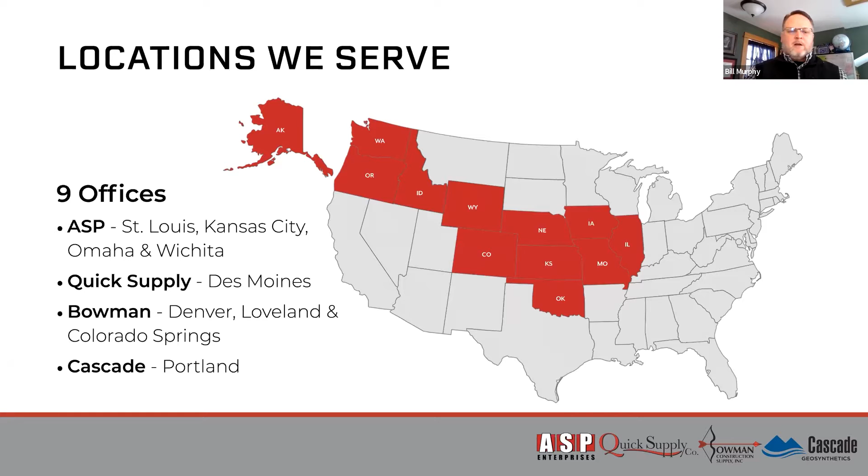Just a quick map of the U.S. that shows the locations that we serve. Most of you are probably tuning in here from the Midwest today. We seem to get a lot of numbers from our ASP and Quick Supply markets, but we are growing in attendance on our webinars with Bowman Construction Supply in Colorado and across the Rocky Mountains to Cascade Geo. I'm available to help with any of those companies.

For those of you that know us really well, this is a repeat. For those of you that are just getting to know us better, we are experts in construction site supply materials. I usually get involved with the categories shown here on the screen now for erosion, sediment control, geosynthetics. Stormwater management is my forte. Revegetation solutions, that's growing in popularity. And hardscapes, we have a hardscapes division in some, but not all of our locations. Those guys really don't need my help, but I'm glad that they're still involved.

We have a couple of those guys on this webinar, but we do try to cross market and help each other out. This connects with what I said before, we can handle a lot of material, and we can handle small jobs as well. The hardscape display is represented with the quick supply display down on the lower left. But our yards continue to grow, our warehouses continue to grow.

We're struggling in some aspects with shipping and receiving. If we get the product anywhere near us, we can get it. We even are working with partners to go to the coast and get what we can. I offered to rent a boat and go out into the ocean to try to get cargo containers, and I was told no, that's a bit extreme. So that's about the only thing we're not doing yet.

Again, I'm proud of our drivers, we take very good care of them. The world is short of drivers, our country's short of drivers, there's signs all over the big cities trying to recruit drivers. So it's important that companies keep theirs happy, and we're blessed, very, very blessed.

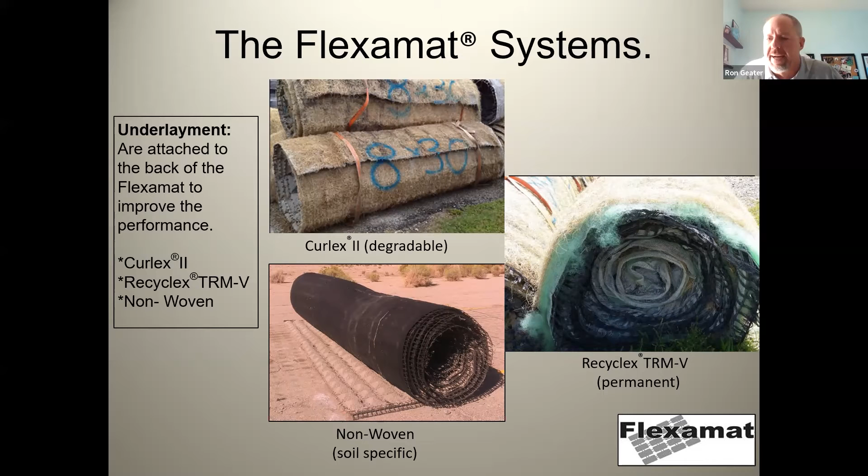So the standard, you're going to use for sheet flow, like on a slope. Flexamat Plus would be at an outlet, a channel. And the 10-ounce non-woven, you're looking at drivable surfaces, bridge abutments, anything like that.

You can see we offer multiple widths. Standard lengths are 30, 40, 50, but we can customize. If your job's 22 feet or 31 feet, we can make that happen.

Here we have a new feature that we've created about a year ago. Why did you do that? Well, I'm going to get into that, Bill. I've got some slides here to show you exactly why we created this extension.

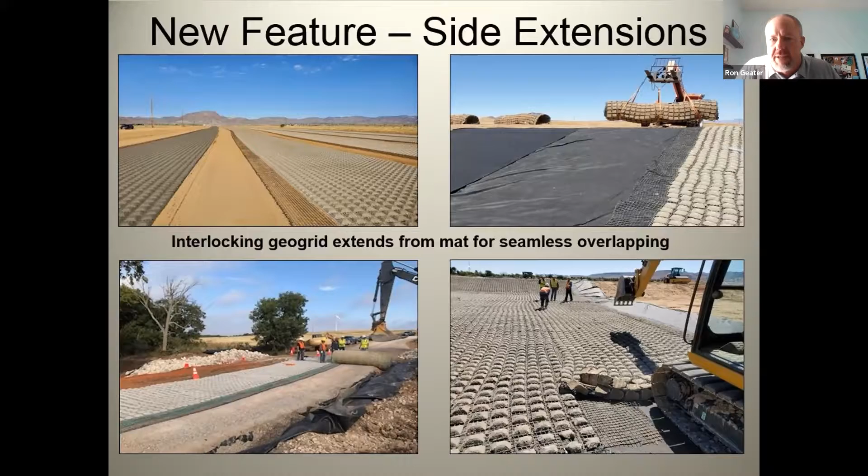Essentially, the widest mat we make is 16 foot wide. So when we make the tail, we can block off part of the machine and make a 15.5 foot wide mat with a 12-inch geogrid tail and the erosion control blanket underneath it.

Now that we have the tail, this is what the extension looks like. So when you're looking at the roll and you're unrolling it, the tail, if it's on the right, it's a right side extension. If it's on the left, it's a left side extension. So I wanted to show a couple of different jobs on how this is being used.

All right, so here you can see the pipe there in the background. This is an install where we put the tail parallel to flow. So instead of, if we didn't have that tail there, the contractor would have had to peel back, put in the erosion control blanket, peel it back, lay the next mat. We've already got that in there for them. They don't have to do anything.

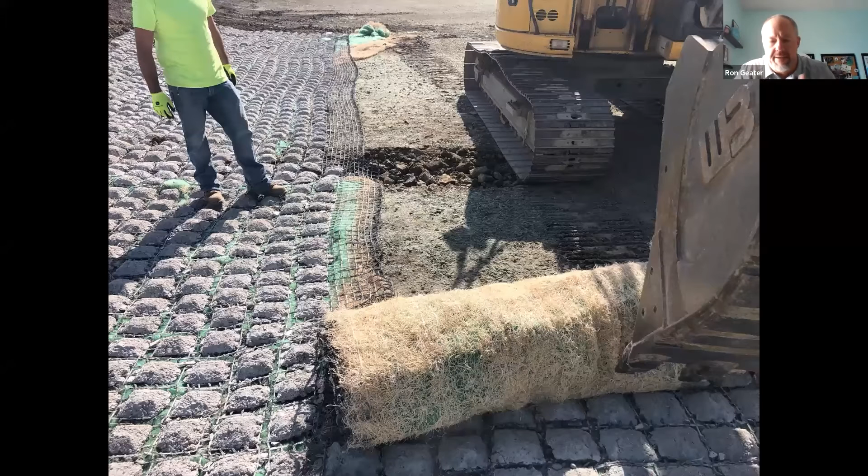So you've got your tail, and then you'll see as they unroll it, covering up and making a nice tight fit. So there they are unrolling it.

Yeah, that delay gets a little longer sometimes. 8 or 9 seconds is too much. You're doing so great. There it is. It's all locked in. It's going nowhere. So there's parallel to flow.

And then last year I happened to be on a job site where I wanted to be able to show perpendicular to flow. So you'll see the first mat is, you know, the 15.5, you've got your tail. So to the left of the tail, obviously that's the slope we're going up. So you've got water, when the water hits the mat, it's each mat, it's going to push it into each one of those tails.

You wouldn't want to have the tail on the opposite side, because if you did, it would actually be pulling away from one another, and we wanted to pull into the next mat. So right there, you can see this was a job that they had all of that installed in, I want to say, 5 or 6 hours, which this contractor is very experienced. So it went in very well.

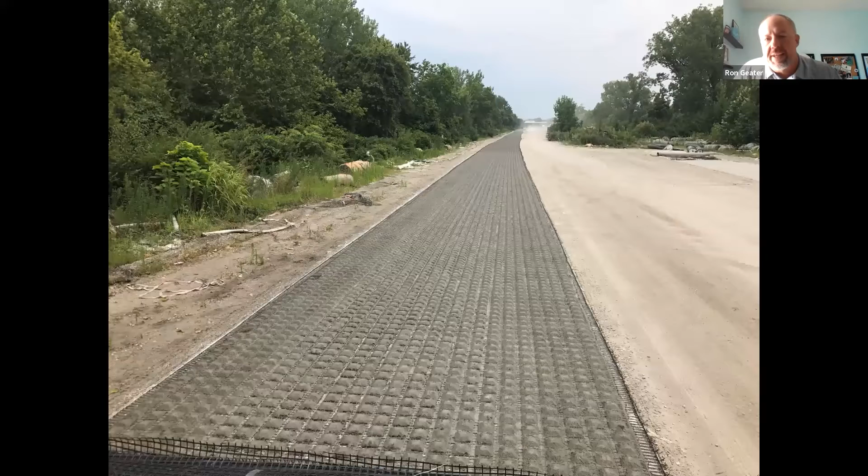So this is our production yard in Cincinnati. Our machine's 16 foot wide. Essentially, we have a hopper on the machine, a ready mix truck pulls up. Once they start to pull the machine, the grid flows in with the concrete into the molds. And there's just a shot. We can make one mat in one day, 16 foot wide by a mile long.

And then the next slide is my counterpart that lives in Tallahassee. He was able to put a 4-block sample in his yard. He took the sample out because he was going to a trade show. And this is to show you why this system works. You can see all that great root system that has burrowed into the soils, and you got that grass growing up. Once you get that grass growing up to the block, it's locked in, the product's going nowhere.

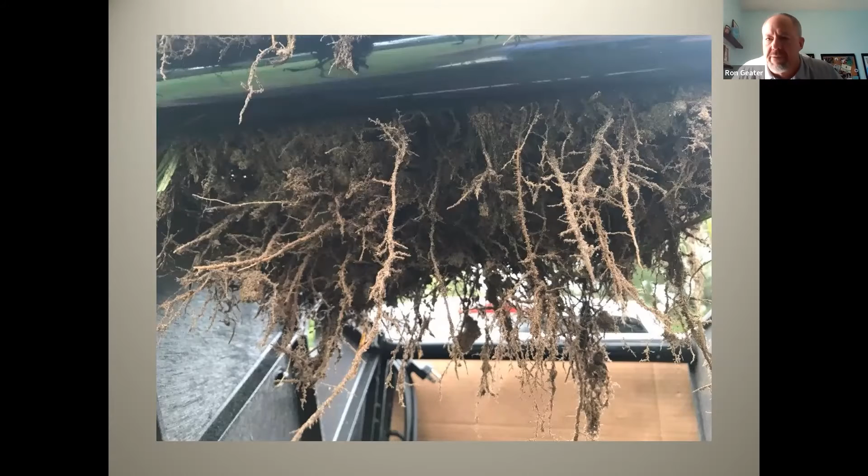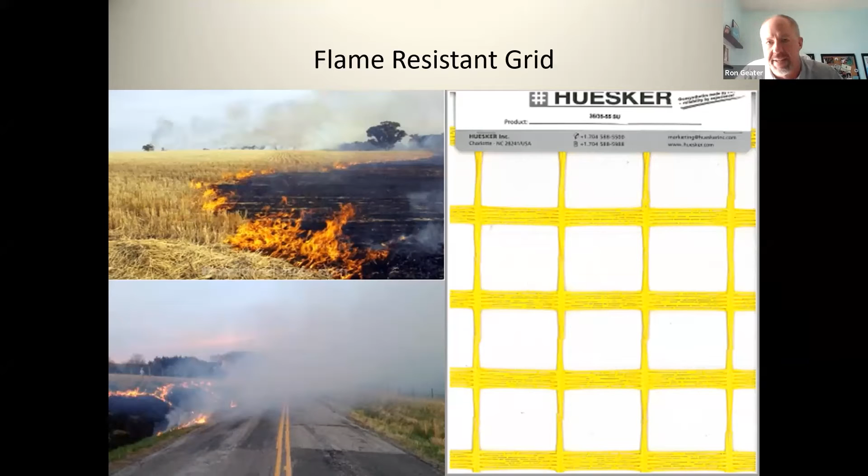I keep this in here. One of the jobs I did with ASP in Lenexa, Kansas, they wanted a flame resistant grid. So HUESKER was able to provide that for us. You could probably believe this if you're from Kansas City or that Lenexa area, but when they get 5 inches of rain, the water will be halfway up those trees. So I was told the reason we went with the flame resistant is because they wanted to plant a native seed and at some point do a controlled burn.

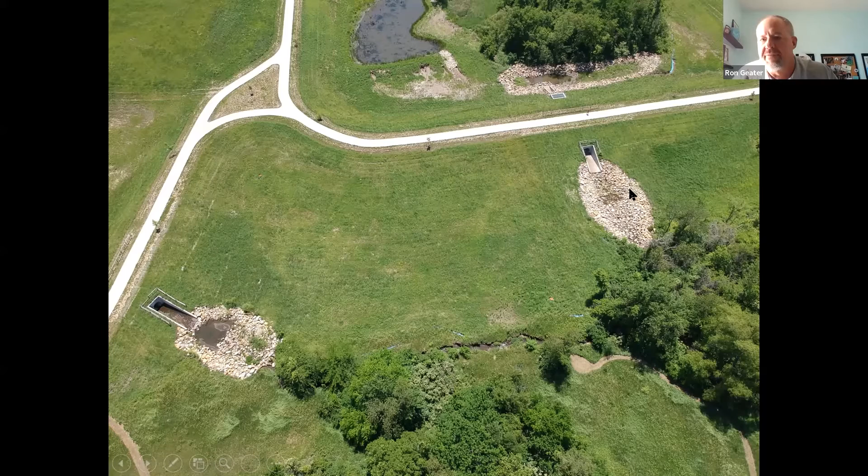The 6460 large scale flume testing, that flume is 2 foot wide. What they do is they run water over the product for hours and hours, trying to get a 1/2 inch of soil loss so we can determine our shear stress and water velocities. So this is a 30% slope on a sandy loam soil. Our shear stress is 24 pounds per square foot. Water velocity is 19 feet per second.

And when you put Flexamat up against other TRMs, riprap, whatever it is, you can see we're 2, 3, 4 times their values. But really the key thing to look at here is where it says unvegetated. You know, we do have a TRM underneath the Flexamat Plus system, but in order for them to get to their, let's say 10 pounds of shear stress, that blanket has got to be vegetated.

So let's say you specify a TRM in a channel, 3 days later, you get a 3-inch, 4-inch rain event. It could wipe that blanket out. The great thing about Flexamat is day one, when you put in my product, it doesn't matter how much it rains, it's going to stay in place and not move.

And this is just a good example to show a nice clean look compared to, you know, you don't have to worry about a mower hitting rocks or weeds growing up through it, or kids throwing rocks. If they wanted this vegetated, it could be. If they want to mow over it, they can do that as well.

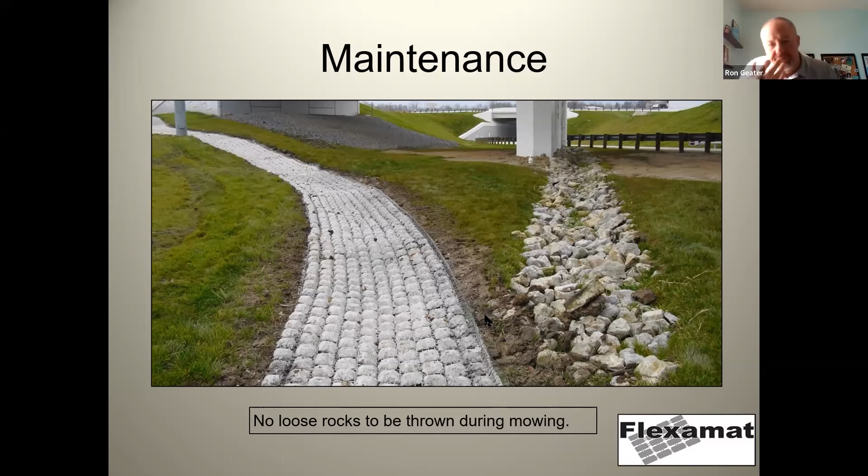You're going to find out in this presentation, I'm not a big fan of riprap. And normally when I make fun of it, people tell me, well, just use bigger rock, right? Well, you know, sometimes that works, sometimes it doesn't. But as you can see in this example, the Flexamat has stayed, whereas the water came across and knocked some pretty decent size riprap over and out of the way.

So I just figured this guy right here on his clipboard is writing down how much he really and thoroughly enjoys riprap.

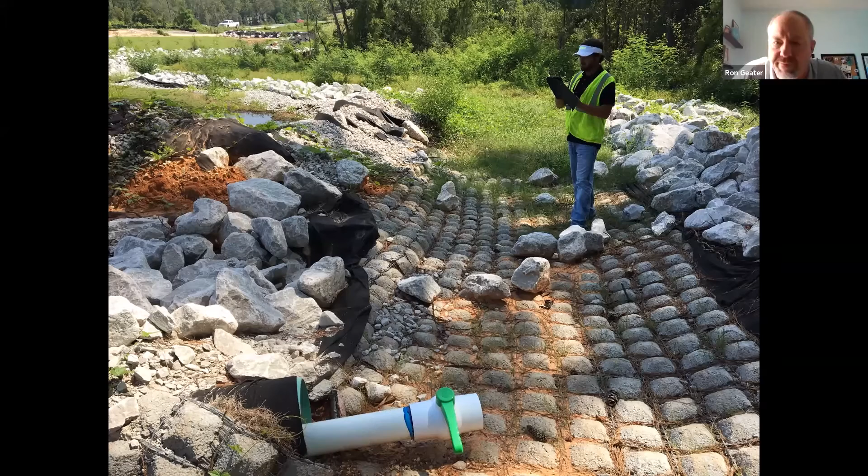Okay, this is something I put in here. This is what you don't want to do. This is not how you want to design Flexamat, is leaving a 2 or 3 foot gap, filling that in with riprap, and then starting your Flexamat there. You know, this is for overtopping. You would really want to start the mat up next to the side of the pavement and then work your way down the slope.

Here we say the performance life is 75 years. The reason is once you get grass growing up or natural sedimentation filling in over the grid, that's why we say the product will last so long.

Once again, we talked about one truckload covering 4,800 square feet. If you take the same area and put 18 inches of riprap, instead of bringing in one truck, they have to bring in 37. Not too good for the environment.

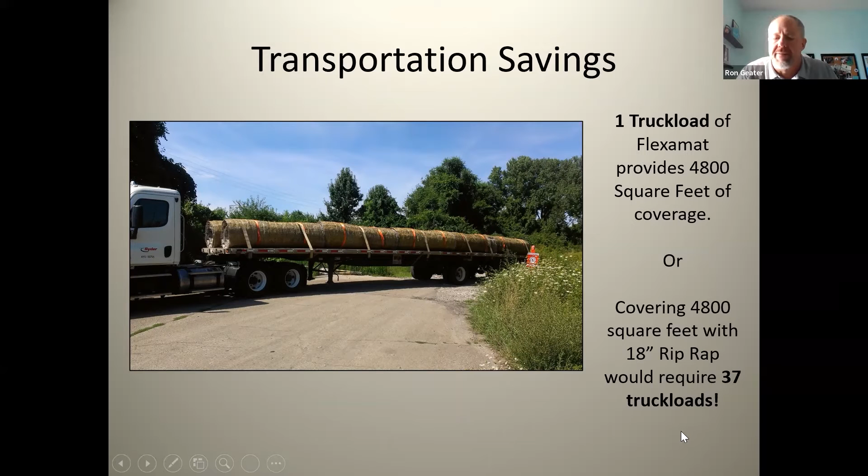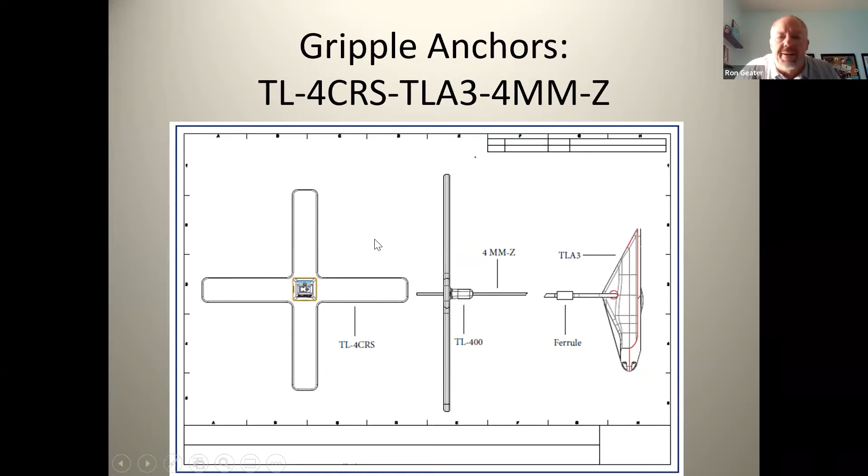We do work with a company called Gripple. They make us a crossplate anchor. What you need for this is a gas-powered driver and a drive rod, it's a jack jaw. The crossplate is now covered with epoxy, and it's all one piece, the anchor's all together.

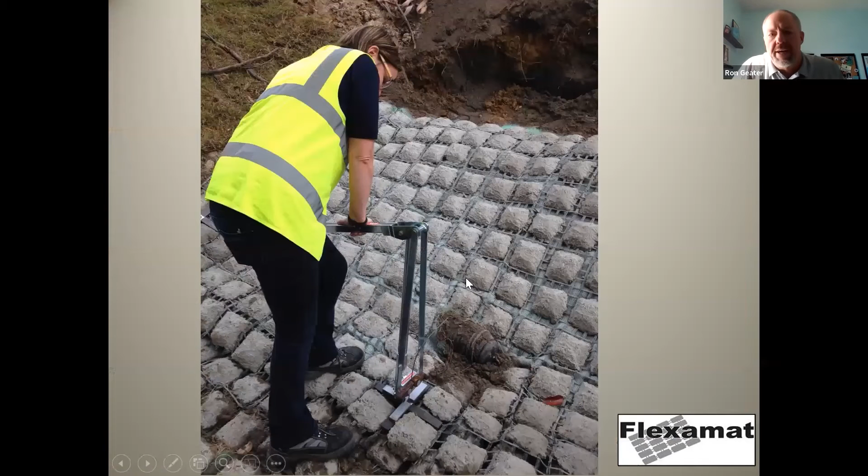I normally used to say the only time you'd use a crossplate anchor is maybe at the bottom of a channel where you're worried about the water lifting the mat. So what you do is take the driver, drive it down, then get a hold of it with the jack jaw and grab that cable. All it takes is about one and a half handles pushing down. It'll set the duckbill anchor that went in skinny, and then for the excess, you just take your wire clippers and cut it off.

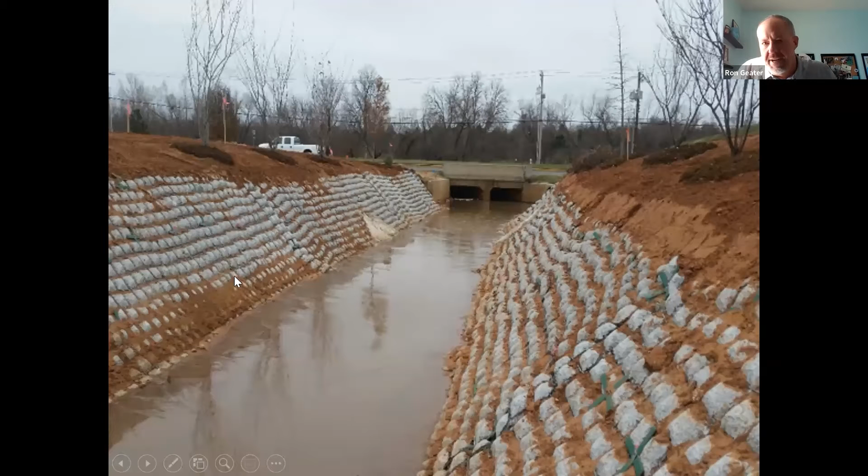So bottom of a channel or a 1-to-1 slope, this is pretty steep. Manufacturer's recommendation is to put an anchor in every 3 feet in a diamond pattern.

We do go around trees. I'm going to show you how we go around this outlet. We do boat ramps too, it's pretty versatile.

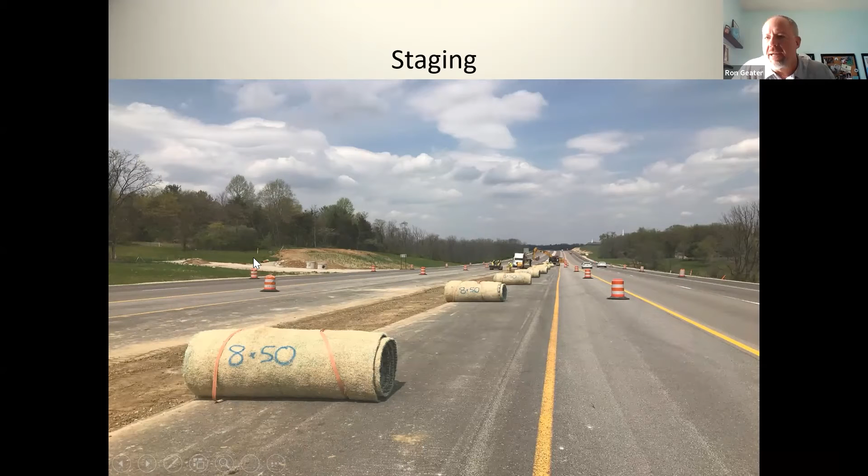Every one of our rolls is labeled with the size of it. So it's really great for the truck to pull up, they know that each roll is going to go 50 feet. So now it's really easy for the installer, for the contractor, to grab it, unroll it, grab it, and unroll it, and not have to worry about stockpiling across the road and dodging traffic and things like that.

Safety-wise, a lot of DOTs like to use riprap as check dams. This is mowable though, so if a car goes off the road, it's not going to do anything to the Flexamat.

Here's a job 20 minutes from where I live. So you'll find in this presentation, I have jobs that are this size, a 10 by 40, and I've got jobs that were 250,000 square feet. We do all in betweens.

Up above these guys there's a road, Ireland Road, and whenever they'd get a rain event, that stormwater would come down and wash out the soil and take it into the creek, which is not a good thing. So I went out there, they asked me, hey, would Flexamat work? I said yeah, just soil, backfill it, compact it.

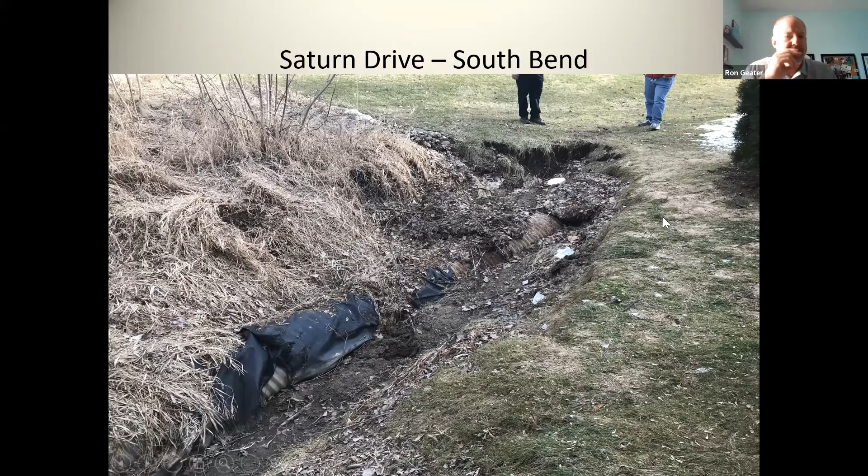So they had their own equipment, they put in a 10 by 40 and got it all locked in, did a great job covering up that piece of culvert. Because the job's only 20 minutes away, I'm able to drive over there anytime I want. I think the thing that kills me the most is the people that live next door to this install, they actually mow it and maintain it. If they didn't, it would look like all this over here. So you can do it either way, mow it or just let it go and be natural.

All right, installation is pretty simple. Prepare your subgrade, get your big rocks and chunks out of there. Slap down your seed and then roll out your mat. I'm really interested to see how this is going to work out.

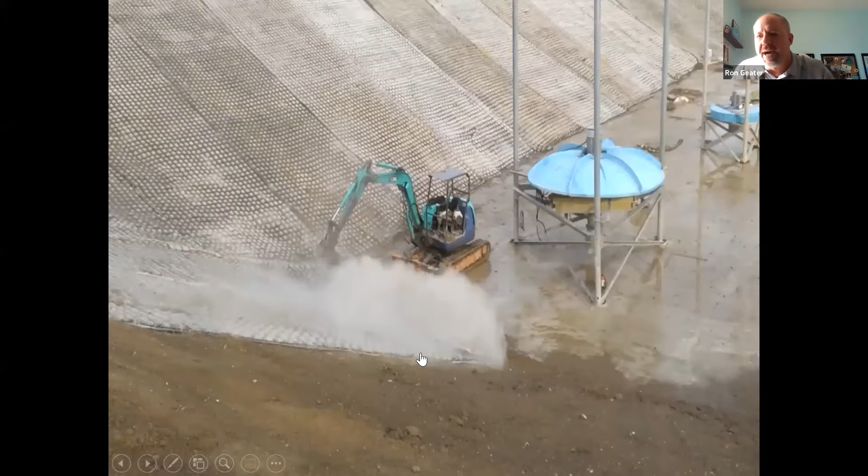All right, so this is really interesting, they're actually using one roll to unroll the next roll. And if it wasn't on this webinar, and we were in real time, this takes all of about 7 seconds to go down the slope. So I really enjoy slope installs, gravity does the work.

So then I thought I'd show you a more realistic install on flat ground. This is an 8 by 50, same job where you saw the staging - a median application for the Indiana DOT. These guys had never worked with the product. I think they thought in the beginning they'd get a truckload installed maybe every couple days. When I timed this video, it took them all of 3 minutes and 42 seconds to unroll it. By the end of the job, they were doing 2 to 3 truckloads a day. So it really does go in very fast.

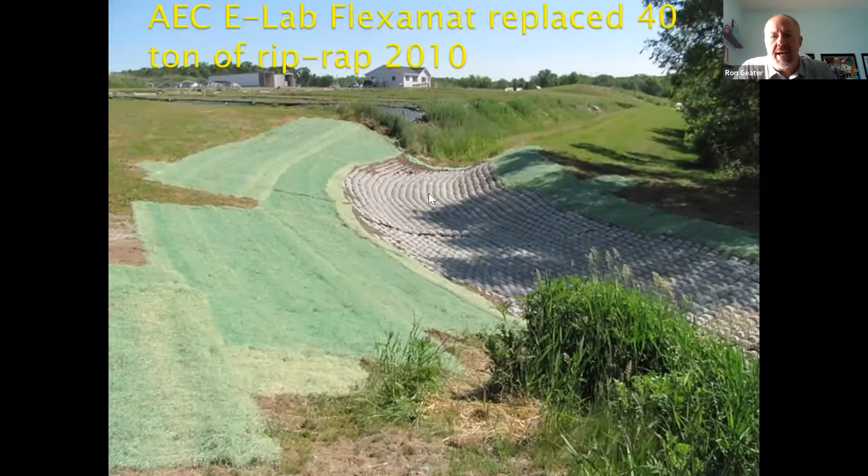Here's American Excelsior's Erosion Control Lab. They used to have 40 ton of rock in there. They tore it out and put in Flexamat. They normally don't let the vegetation get this tall, but they did it for the purpose of showing you that you are able to mow over the product. A little bumpy ride, but it can be done. So he's mowing over it. I'd like to get to the bottom point - where did we get to?

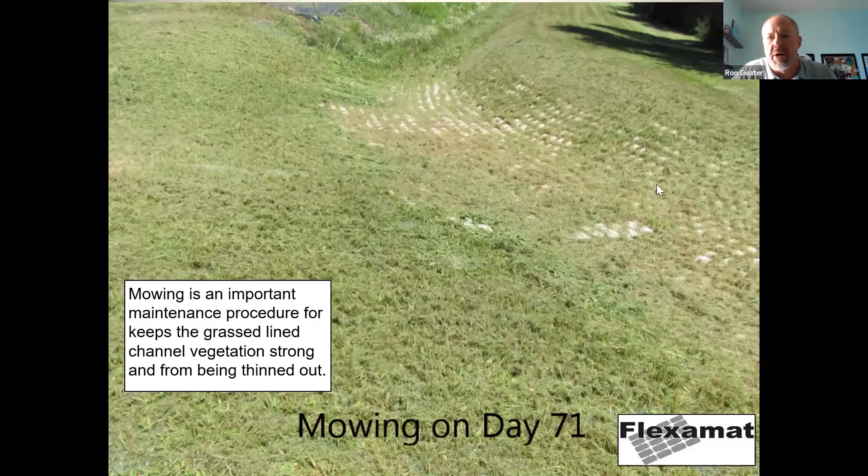A little more than 2 months later, there it is, mowed down. They have an event every September that I've started to go to, so I took this picture a couple of years ago, which would have put the install at about 8 years. This is typically what every job looks like - you don't even know the Flexamat's there. Fully vegetated. I can tell you it sure looks a lot better than that 40 ton of rock they had in there.

This is awesome, I'm excited about this part. So I told Bill that last year we had our guys really work on our details to where they're really like 3D and more detailed than ever.

You can see here where we've got the extension - if you're wider than 16, if you're in the channel and can get out of the channel, you take a couple block out. If you can't get out of the channel, you recess 2 block in at a 45. So this one we're showing, these examples are channel applications parallel to flow.

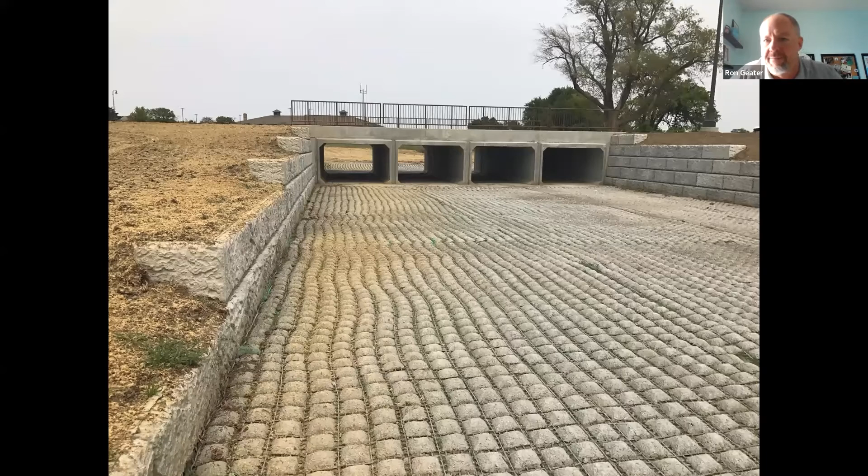So here's a job I did with ASP out of their Wichita location - this is in Wichita, Kansas, at McConnell Air Force Base. A lot of these installs, these contractors had never used the product. I got out there one day when they were getting it prepped up, then got out there another time 6 months later when they had it installed. They did a great job. When I went back a year later, I was just absolutely astounded by the kind of vegetation growing up in this channel.

So then real quick, you just go to the other side, which was much smaller. And then what they did at the structure is they've got concrete at the lip so that when the water goes over it, there's no way for water to get underneath the mat. And then once again, you're going to see another nicely vegetated side of the area.

I want to chime in on that, Ron. So you mentioned the details - this is where it's hugely important. You are really good at showing good and bad examples, really successful projects where they did everything right, and some projects where somebody didn't ask for help, didn't have a pre-con, or didn't listen to instruction and did it wrong. Like anything else that we offer, it's got to be installed right.

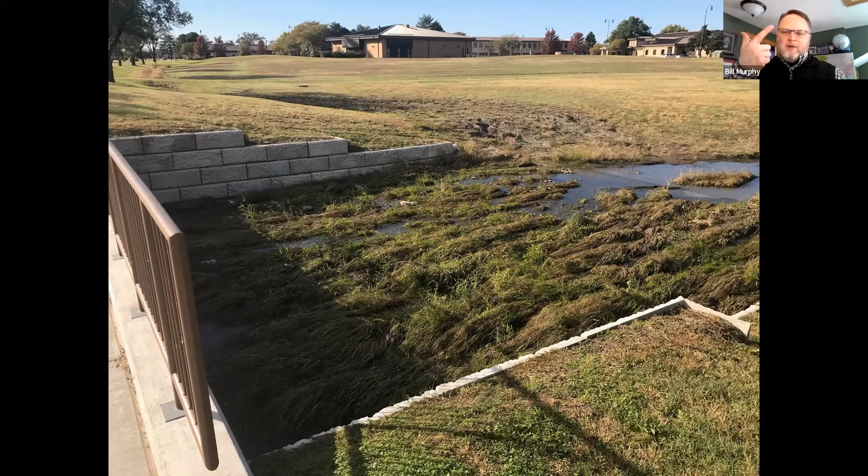So your details are great 3 times. Once with the engineer when they're designing, so they know how to design and how much quantity they're going to need. Second, the bidding process - we love to get to talk to contractors, so if it's somebody new, they bid it right up front instead of being scared and overbidding it. And then the third is the pre-con for installation. So Ron's available, we're all available to our company, we're all available to be on site and help with that.

So I'll go through these real quick. I forget, I put this in the beginning to show the example of the tail, but I did this just to show you the full install. So you've got the tail, and then you're going to see that it's abutted. And now I've got a shot showing the whole job once it's finally completed. There it is - locked in, going nowhere.

Here's probably one of my favorite jobs. This is my first job ever with ASP doing MoDOT.

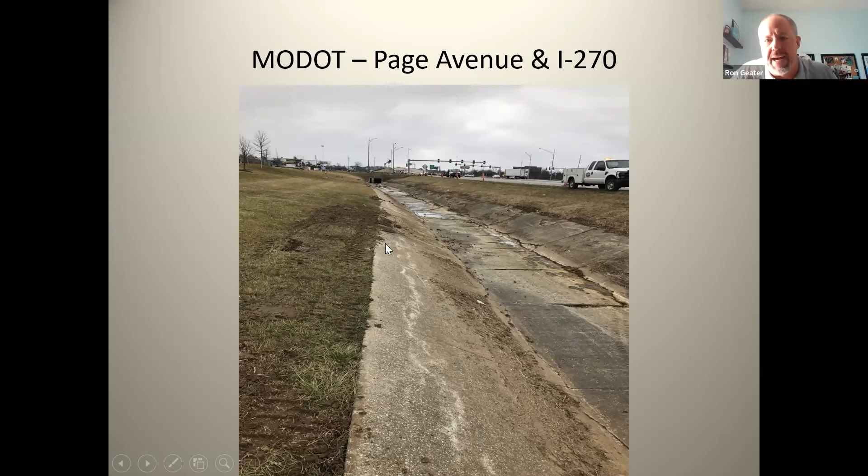Page Avenue. The unfortunate thing about this job is they left all this concrete in there, which is okay, but then they gave us the other two-thirds. What's really interesting is they put a non-woven in the bottom and Flexamat Plus on the side. When I asked about the non-woven, I'm telling you, when I was out there and took this picture, there was no rain that day. This is a channel that gets constant water flow all the time, so they figured if they go with the non-woven, it's not going to vegetate. So that's what they did.

And then I went back, and I'm like, okay, they're right. Nothing's growing in the middle, but got a bunch of weeds coming up the side. The killer thing is when I went back six months later, that's awesome. I mean, it's just like a natural stream bed on steroids. It's not going anywhere. And I went back there this summer and it looks exactly the same.

I wanted to take an aerial shot so you could see the nice vegetated look versus the ugly concrete channel there. The other thing is if you live around St. Louis, you can see the billboard.

If you're harassed at work, you can contact junglelaw.com. It's the only joke I have in the entire presentation. Little plug there.

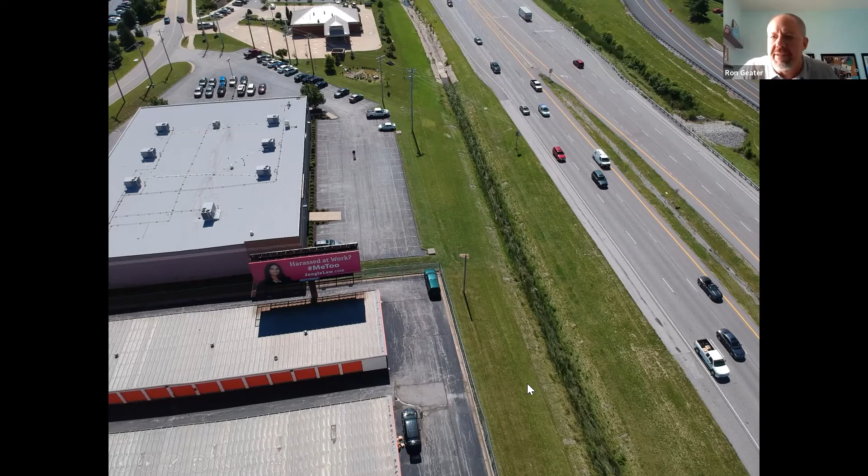Here's another job with ASP. This one's a dandy. This is the southwest side of Kansas City. I did not know this literally until two years after the install that above the Flexamat is about a mile long concrete channel. So they were kind enough to let that mile run all the way down onto my little itty bitty Flexamat right at the tail end.

But that's okay, it's fared well. It looks good, you can see it's vegetated in. Kind of an interesting neighborhood - shopping carts, sofas were in the channel at one time.

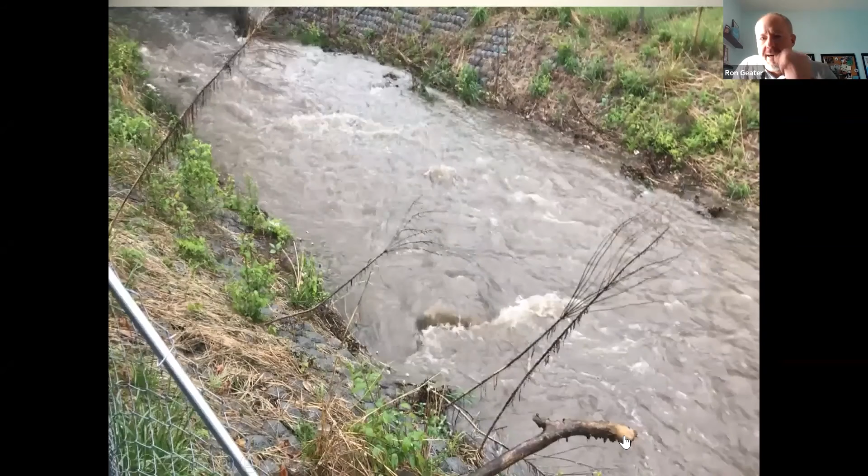And then I happened to be in Kansas City a couple years ago, and I always like it when it rains, so I can go out there and take videos of my product working. The unfortunate thing is when I got out here at this point, the storm had already been done five hours earlier. But if I would have been out there earlier, this water would have been up the side slopes probably another 10 feet and going 10 times faster. Unfortunately, the webinar is not going to give you the true feeling of how fast this water is going, but you can see it's quite a bit that's going over top of it.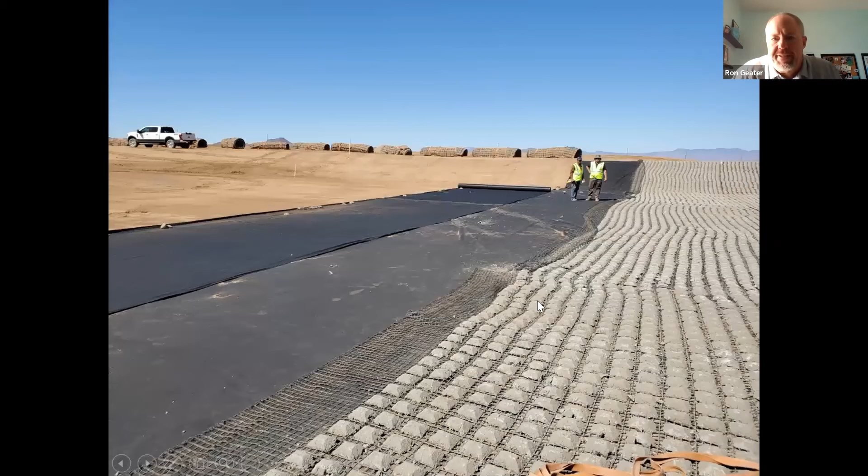So this is a job in Kingman, Arizona. We actually took our fourth machine and produced the mat on site. That's quite a 425,000 square foot channel. You can see how big it is, the width of it. And so here I can see the tails here, which tells me the water's coming at it this way. And then here's just a shot of a lot of Flexamat being installed at one time.

Here's our detail for slope armoring. If you don't have room at the top, you're going to trench in 18 inches, and toe in 18 inches. If you've got 3 or 4 feet at the top of the slope, that's how we normally would like to run the mat. If you're running more than one mat over another, you're just going to do an overlap seam there.

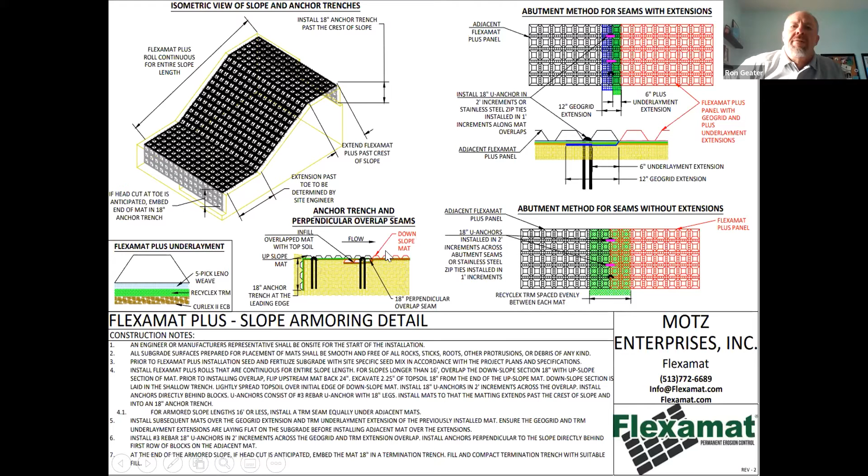And what's good about that is the fact that Flexamat is flexible. It conformed to the earth, it went down with however the contour was. If the product was really rigid, we would have the Grand Canyon under there right now, and we wouldn't even know how bad it is.

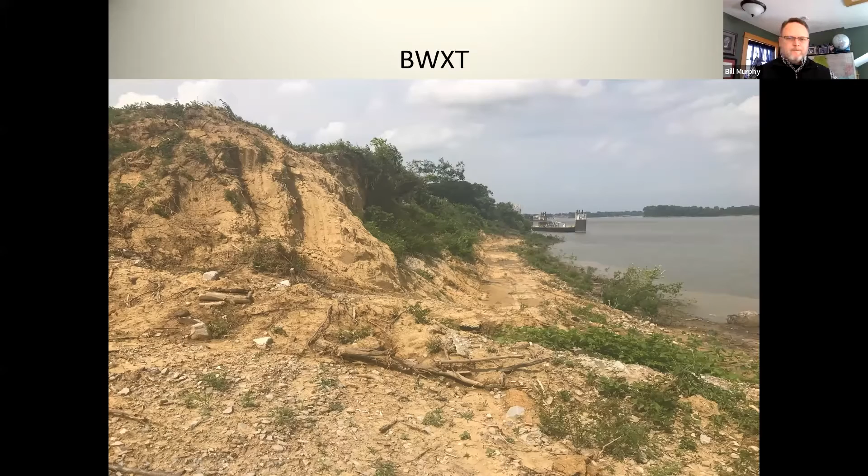All right, so here's a slope that we did on the Ohio River. You can see they had a lot of stuff to grade out. We ended up doing about 200,000 square feet.

One thing I do like to point out about this job is I went back to the engineer to tell him I wanted to do a case study, and I said, I understand the river, but what were some of your considerations of why you use Flexamat?

And he said it really was dependent on the DNR. They wanted something that was wildlife friendly, so deer and things like that could walk over it. They can't walk over riprap. So that was one of the things, which I thought was kind of a neat thing, that people looking at it as being an animal friendly product.

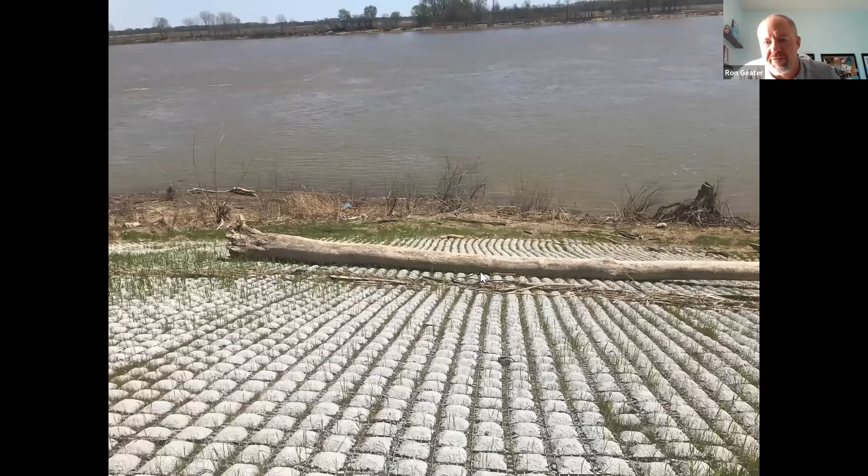I'm going to have to get going. So this was about 4 months after the install. Look at the tree line. And when I go to the next slide, you'll see the water was up on the mat considerably. Actually, where this debris was, I walked from that down to the bottom of the mat. It was up there 33 feet.

The owner of the project had thought at one point this area of the mat had torn away. But once the water receded, as you can see, the contractor did an excellent job tying in the bottom. We do have some crossplate anchors down at the bottom, so it did not go anywhere. I thought it was pretty impressive for that river to be up there for probably a couple weeks and not do anything. And this is just a drone shot showing a wider view of the whole job.

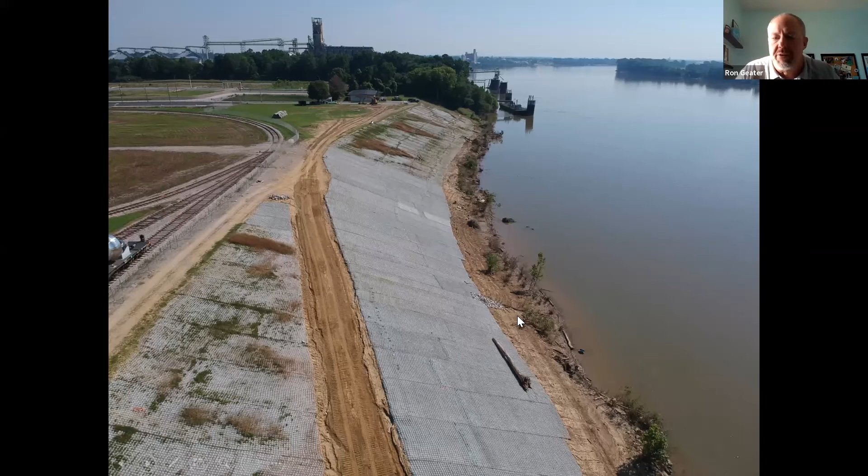Here's our outlet armoring. Right here is that guideline I was telling you about. So a 48-inch pipe, you can use a 16-foot wide mat. Now, if you go to a 60-inch pipe, we're going to have to turn the mat the other way. Basically, where the mat meets the outlet structure, there's going to be an 18-inch trench, and you're going to fill that in with concrete.

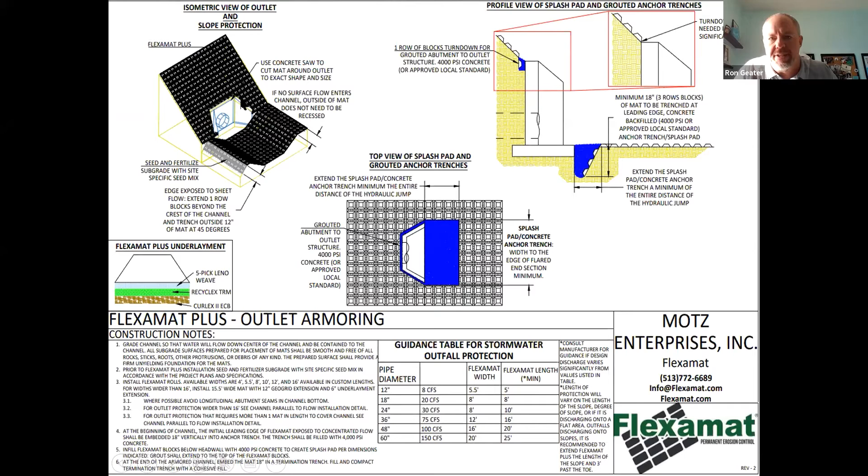And then here is armoring where if you want to go above the structure, that's fine, just roll over and cut out. There may be some areas where you're going to want to put some concrete around the edges or in the front as well.

Here's a job we did this year. This project was called the Indianapolis Levee. To the right of the excavator is the White River that runs through Indianapolis.

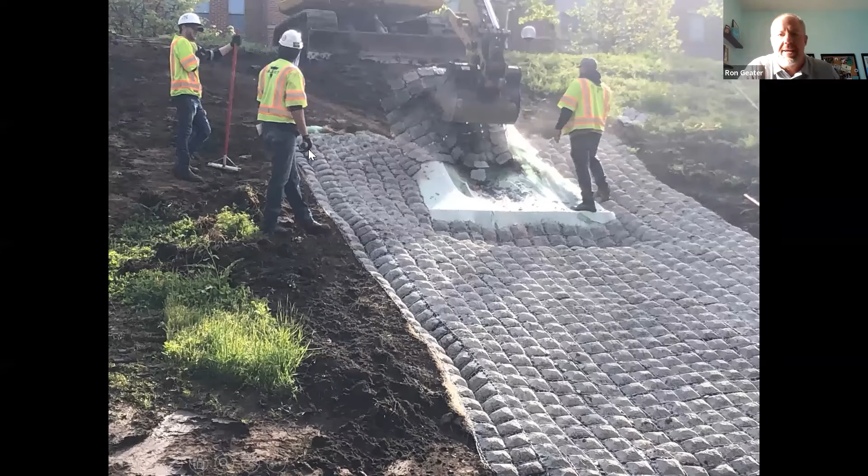I just happened to be out on the job site when they were doing the install, so I got a picture of them setting the roll above and rolling it out. You can see they cut out around the structure, now they're grabbing the excess and pulling it out, which is pretty neat.

That's beautiful. That's a problem area, always up and around those culverts. That's awesome. Correct.

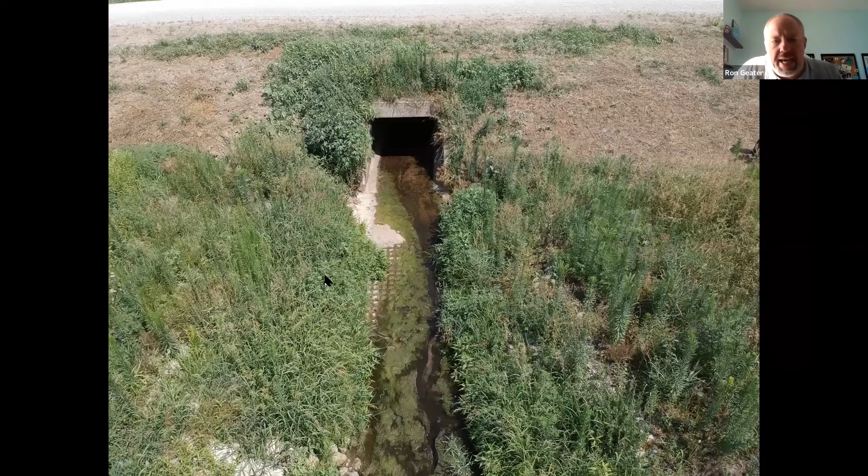But when you go back to it, it's amazing how some things just tend to work out. What I like about this was a county job, and they told me that the water would actually go over the road, and they just got tired of going back 3, 4, 5 times to repair it. Now this is off their bucket list. They've got it armored, it's got vegetation growing up through it. Now they don't have to worry about that problem anymore - they can move on to bigger and better things.

Here you can see the concrete above. They went around nice and tight around there, and then down the slope we go.

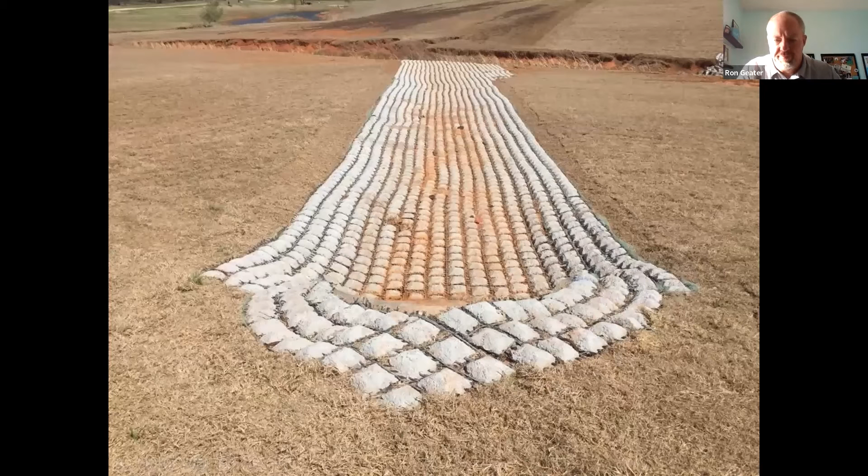And like I said, if you want to mow over that, if they want that vegetated, no big deal - let it grow.

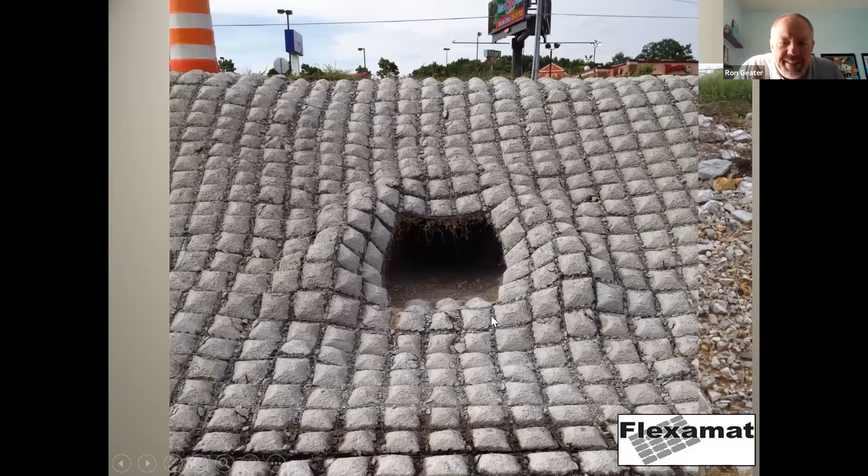All right, here's the outlet. Roll it over, and then obviously cut it out, and you'll see they did a great job getting a nice tight fit around that outlet structure.

And here's an overview of the entire channel and what it looks like. Looks awesome.

You mentioned earlier about mowing over it. One of the big things this time of year is snowmobiles - a lot of the DOTs don't want any rock. Snowmobiles hitting that's tragic. Correct.

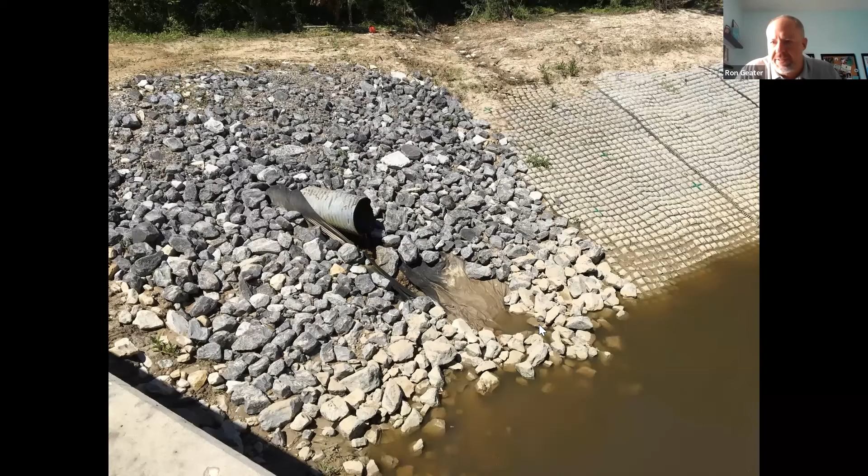And then I always, just because it's me, I've got to make fun of riprap at some point. So why they didn't take the Flexamat all the way up to this concrete abutment, I don't know. But as you can see, they're just going to have to keep going back and throwing more rock at it, time after each rain event.

Here is our detail for shoreline. Most of the shorelines I do are typically 8 foot wide. We want to use the Flexamat Plus.

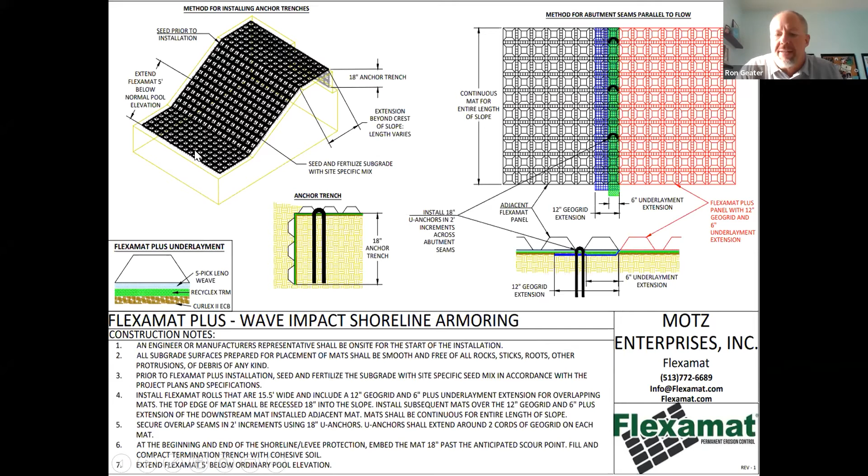So this is running parallel with the shoreline. If you've got an area wider than 8 feet, then you're going to start at the top and work your way down, and we typically recommend about 4 feet going into the water. That's just because if you have any muskrat issues trying to burrow in, that does a really good job of deterring them from making the mat fail.

So here you can see what the shoreline looked like with Flexamat installed. Now the guy can mow right up to the water's edge and realistically not worry about the lawnmower going into the water, which down in Florida apparently happens a lot.

This is an HOA I did a couple years ago. I don't really particularly want my backyard to look like that.

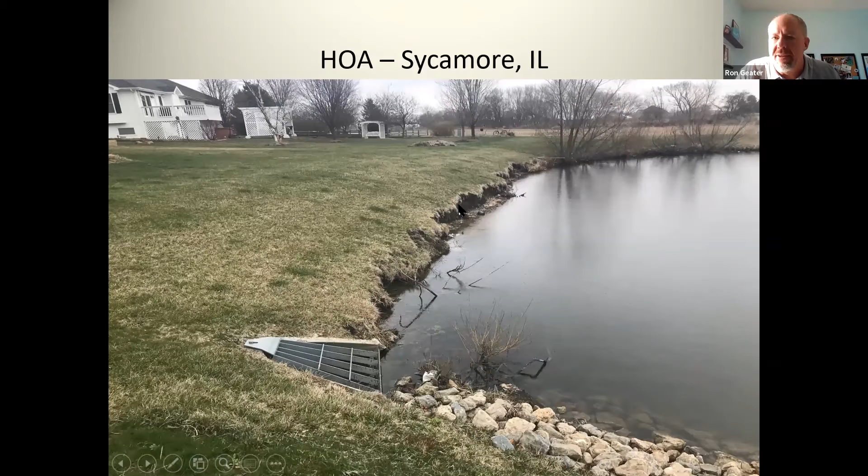So our first job was to do about 200 linear feet. Contractor went out there, did a really good job, got 4 foot in the water, 4 foot above, cleaned everything up. Now they've got a nice clean looking backyard.

And then I went back a year later and you'll see how it vegetated in real nice. There's no issues there anymore.

And here's that same job. Apparently after we did the 200 linear feet, they wanted to do another 8,500 linear feet. So this is just kind of an overview of my drone shot.

Here's a job we did this before I started with Flexamat, with ASP in Omaha. I just on this shoreline - this is Adams Park, I believe. I just love showing this before and after. This is just some pretty phenomenal vegetation that's growing up through it.

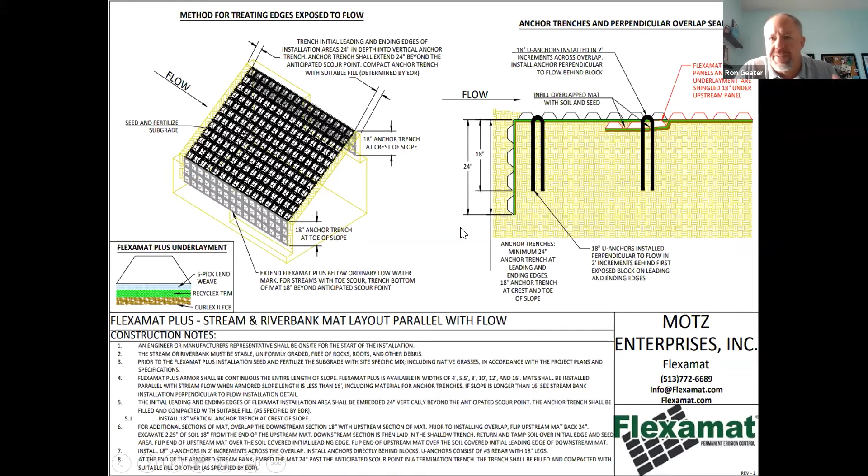Stream bank, river bank, once again trenching the leading edge. If you can get past the top of the slope, 18-inch anchor trench at the toe. A lot of these are the same things - we're just being repetitive on how things are installed. So this one you're going to be running it sideways, and then this would be running it down - so you've got parallel to flow and then perpendicular to flow.

So here's a nice little job. The water never stopped running.

I happened to be there once again for the install. You can see they've got their more than 18-inch trench, which is fine. They're going to install it, and you can see there's an orange spray paint mark on the side so they know where the tail is going to end. So they put in their 16, and now they can line up their 8-foot and line it there.

What I love about this job is it's not only parallel to flow, but it's also perpendicular. In this next photo, we ran all the mats in the bottom and some of these on the side slopes parallel to flow. But when we got to this corner, we actually went perpendicular. So before we rolled these mats out, we put these 2 mats in, rolled them down, and then did the overlap there so they're all tied in. They've got an 18-inch trench at the bridge abutment that they put concrete in.

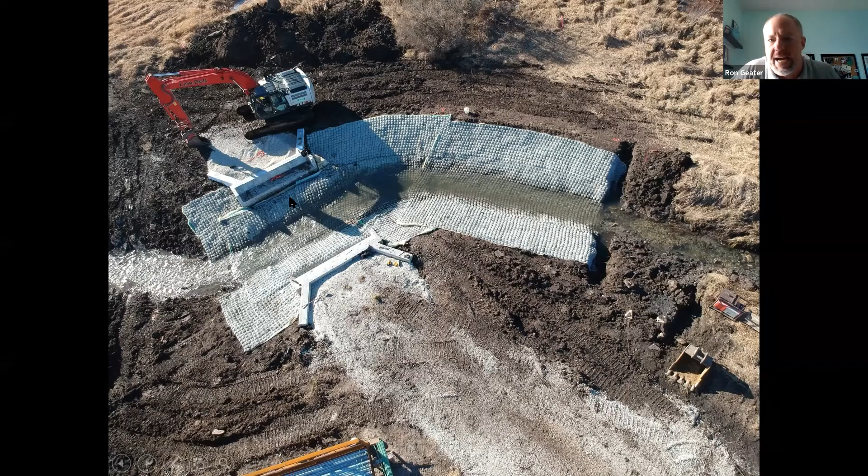I went back a year later, which was probably 3 or 4 months ago, because I love to get my drone shots. This was probably 8 months ago, and it started to vegetate in. Then I went about 6 months after that, and you'll see how it's really doing a great job vegetating in.

Can you imagine what that job would look like if it was all riprap rock slowing the water down? Can you imagine how bad that would look if it was all rock filled with trash? It looks bad enough with the rock that washed down there. Yeah.

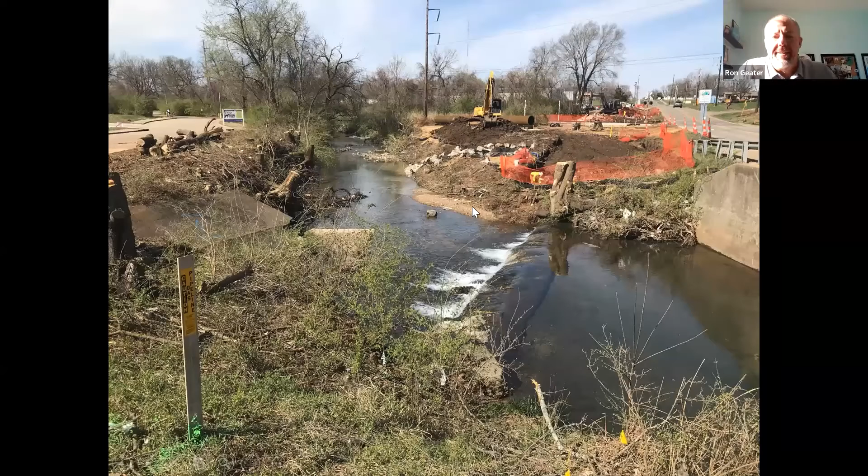Here's a job I did with ASP, down in Springfield, Missouri. I just happened to be out there before the job was even bid. I'm not a big fan of how much rock they put in there, but you'll see they lined both sides of the channel.

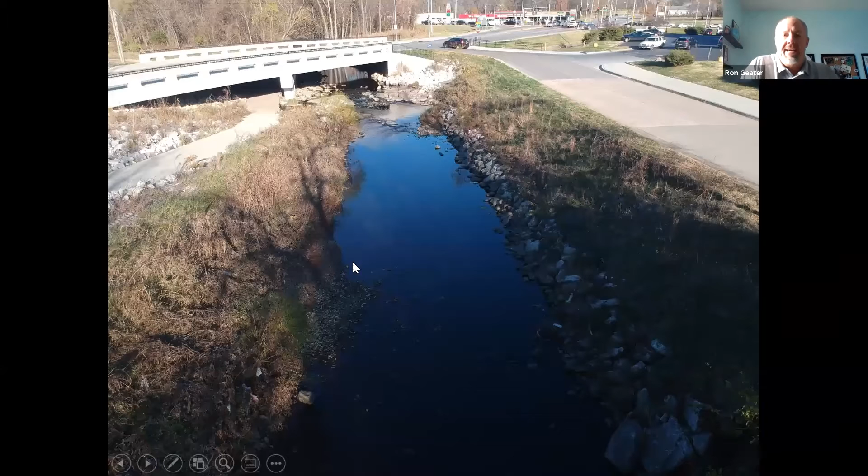I was fortunate enough to get out there - it's hard to see in this photo, but they planted a lot of trees on this side over here. This was probably a couple months ago when I happened to be out there, and it's phenomenal - it just vegetated in greatly.

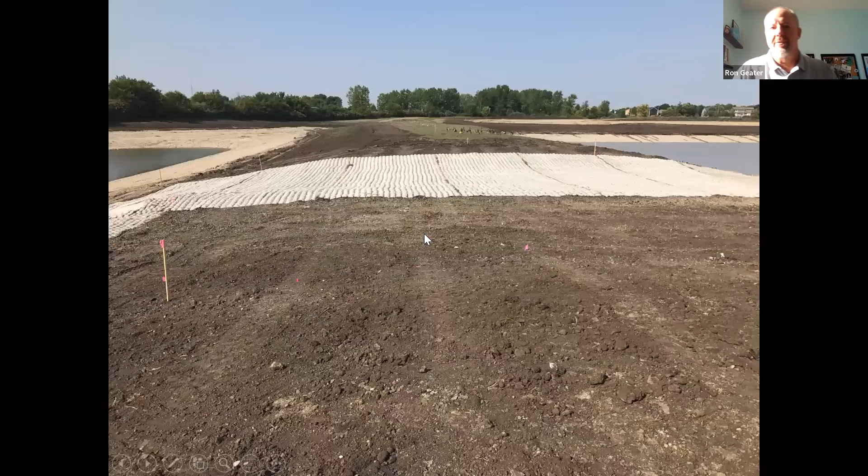We do overflow areas, so here's a job I did with Quick Supply in Ankeny. You've got 2 retention ponds. I really need to get back out there, Bill - the last time I was there it was too cold and dormant, but this thing has really done a good job vegetating in.

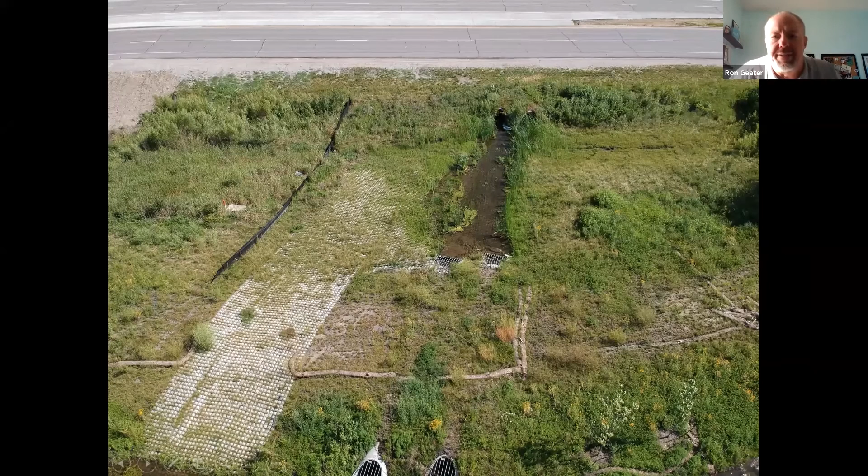I just leave this in here. One thing you don't want to do is design the Flexamat to end up at the edge of the outlet - that's a bad deal, because then the water comes out, has a chance to rip down that side, and create a real problem. The contractor did do a good job - they kind of bermed it up, and it didn't really cut into it. So it's done a good job holding its place in there.

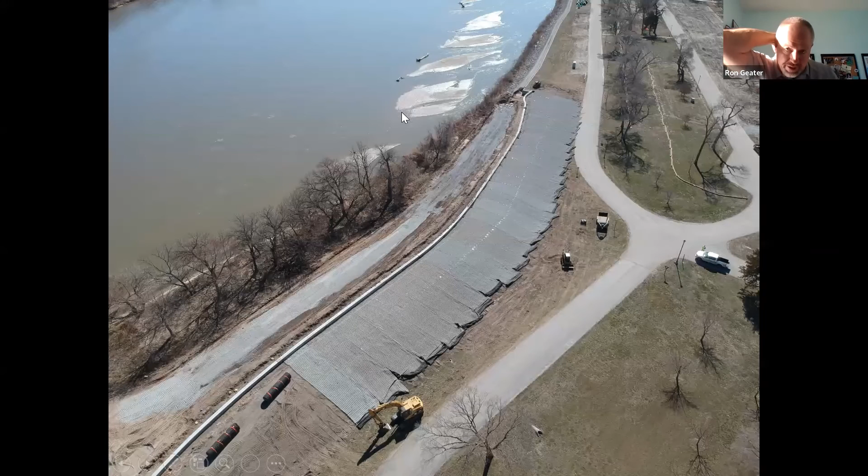Here's a job, levee flood control. They wanted to use non-woven, and they were actually going to cover up the mat with like 3 or 4 inches of dirt and then seed on top of it. So this is a very challenging job - it was really more difficult than I thought. This is just part of it. You can see these are cross plate anchors in there.

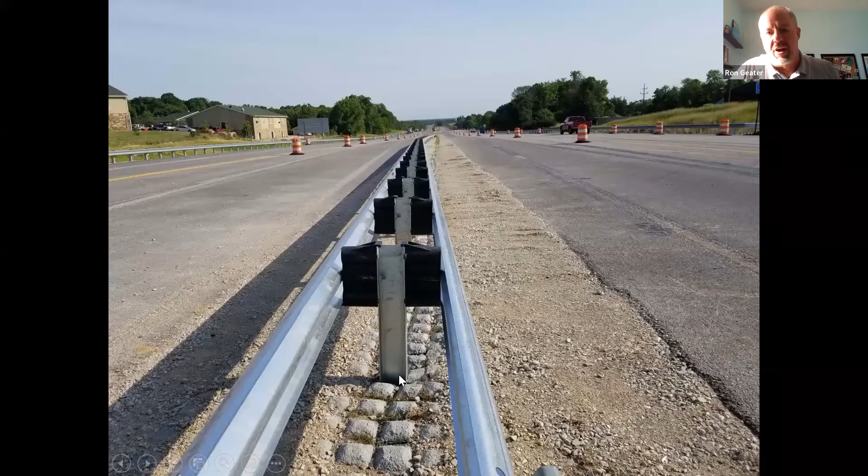DOTs - I'm going to try to run through these as fast as the slides will let me. Here's that median job. The only reason I put this one back in again was to show the guardrail post. We literally told the guy he was going to have to cut out a couple block, and instead he found out the post fit directly in between 2 blocks. So that, as you can see, would have been a nightmare - there's thousands and thousands of posts there. Here's the other end of the job - it was much wider, so we used a 16-foot wide mat instead of an 8.

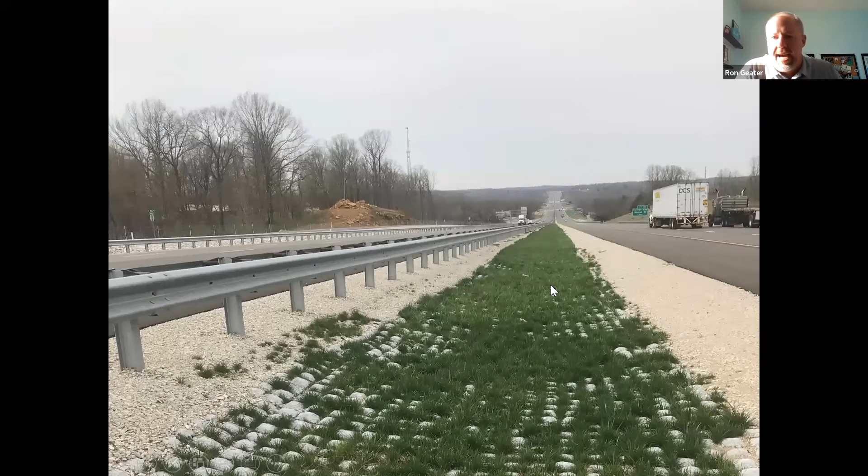I go by this job a lot because I live in Indiana, and it looks way better than even that right there, but it came in very nice.

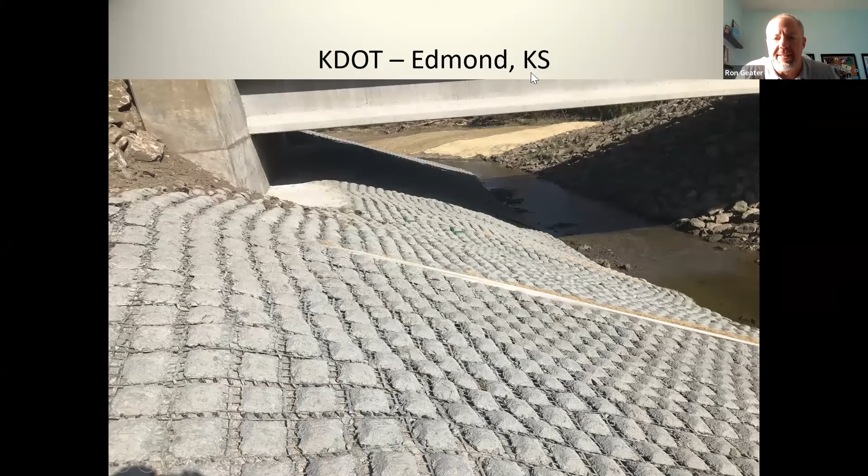Here's a job with ASP in no man's land, Edmond, Kansas. The only reason I show this job is because it's a great example of how we used to do the install before we had the tail. See how time consuming this is for the contractor? He had to roll down a roll and then peel back and peel back and peel back. Just very, very time consuming.

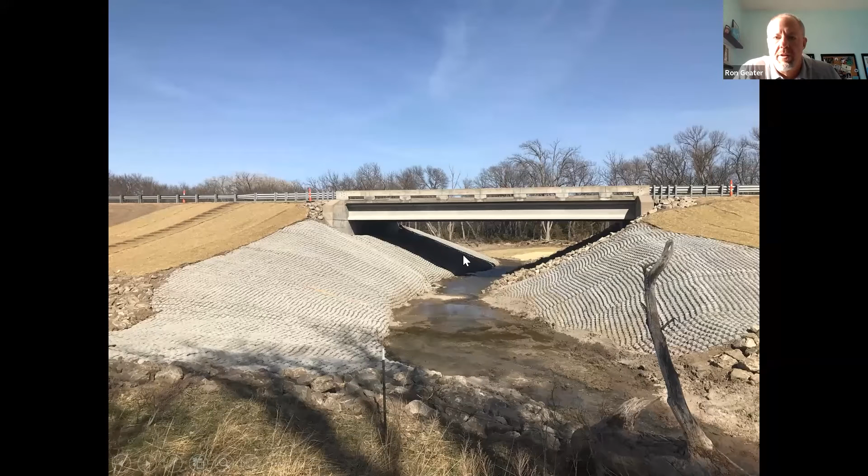The water flow, the main concentrate is hitting there. That's why they left the riprap over there, because it has none of the work to do. So this was 6 months after the job. Then I went back a year later, and you'll see it's vegetated in very nicely.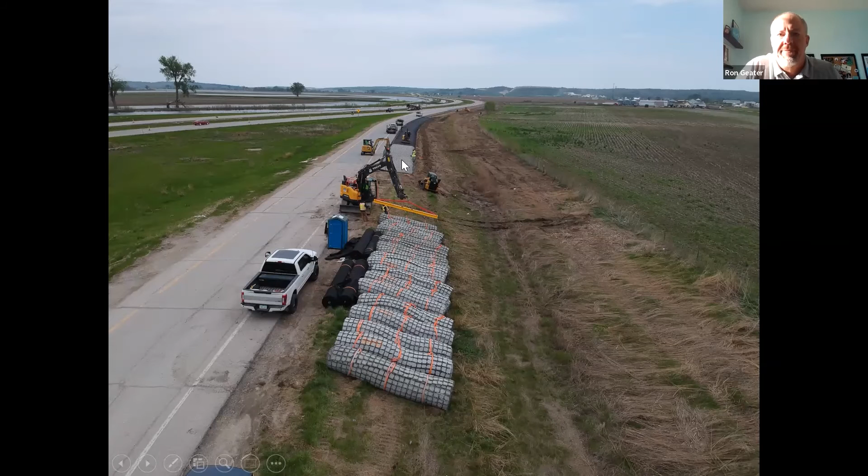Here's a roadside job, just a bunch of 16 by 60s. It's just DOTs find a lot of different ways on how to use the product. It's not just bridge abutments or slopes or outlets or anything like that.

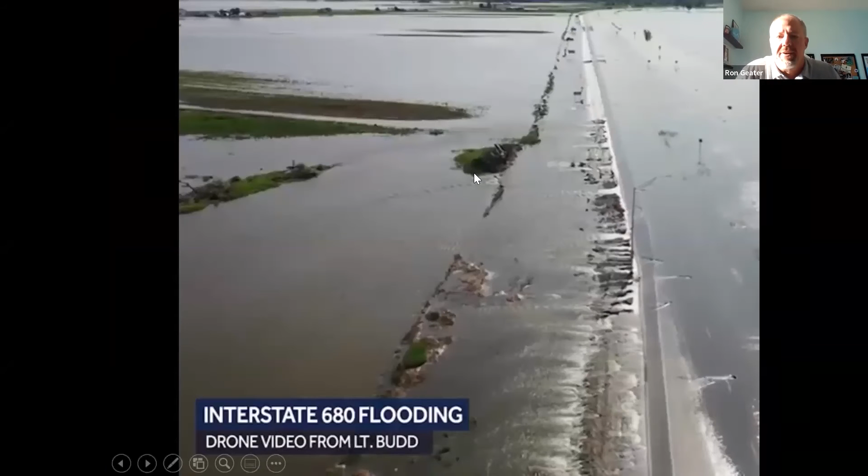The unfortunate thing was on this job, it actually got flooded during the install. And when I went to go back, I wanted to get a picture of all the mat, and unfortunately they put 10 inches of topsoil and erosion control blanket, and now you don't even know the mat is there.

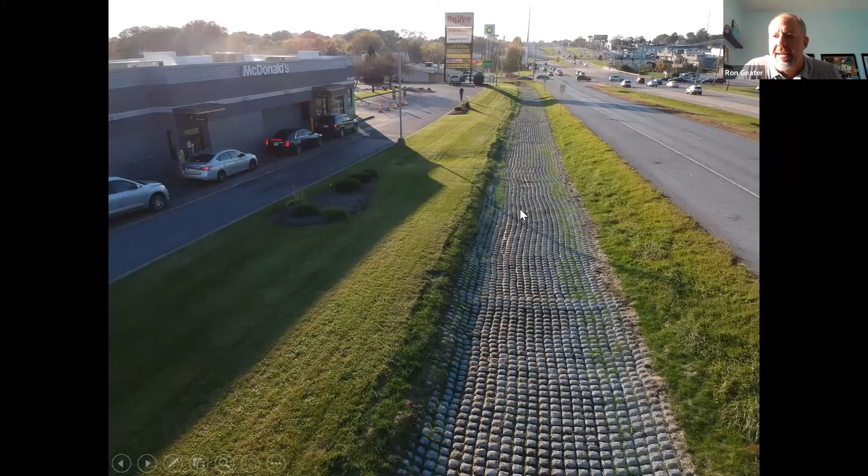Here's a job over in Davenport. This one's kind of sad. I can't go back to it anymore because every time I go by there, someone's spraying Roundup on it, and I don't know why you would not want that channel to be filled in with vegetation, but they spray Roundup. Somebody at McDonald's apparently doesn't like Flexamat.

Landfills, real quick, we do a lot of letdown structures. Here's one we did recently this year. You can see the berm that they've got created here.

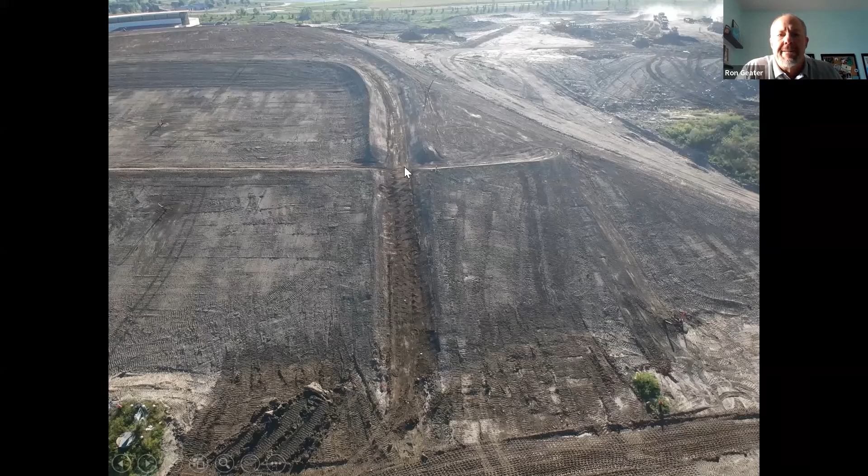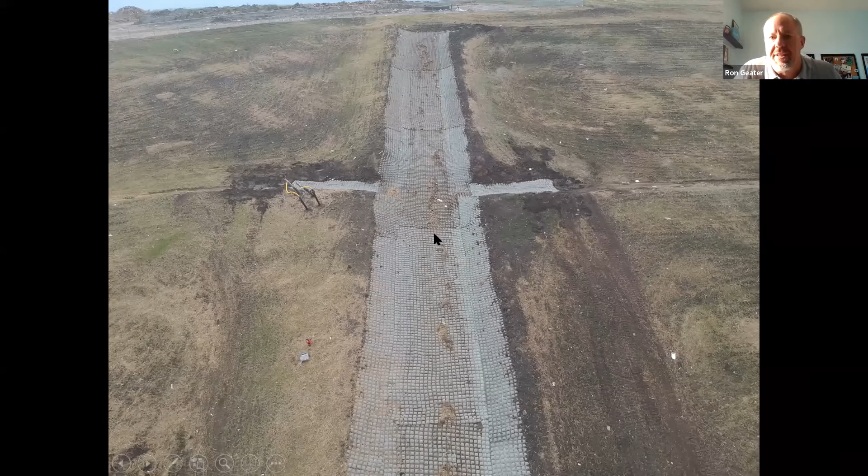Unfortunately, this is a job that I did with ASP, and the day I went out there, I drove 5 hours to be there, and the guy told me he couldn't do the install. So I went back about 6 weeks later and got these drone shots of his install. The other unfortunate thing is I've had conversations with the engineer, and the guy forgot to put seed underneath the mat. So the engineer is going to make a determination at the beginning of spring whether or not the guy's going to have to tear it all out.

Here's a detail with our Flexamat 10 ounce non-woven. Depending on what kind of traffic you've got, we give you different stone variations of what kind of depth you should have on there. So here's a drivable surface, a boat ramp.

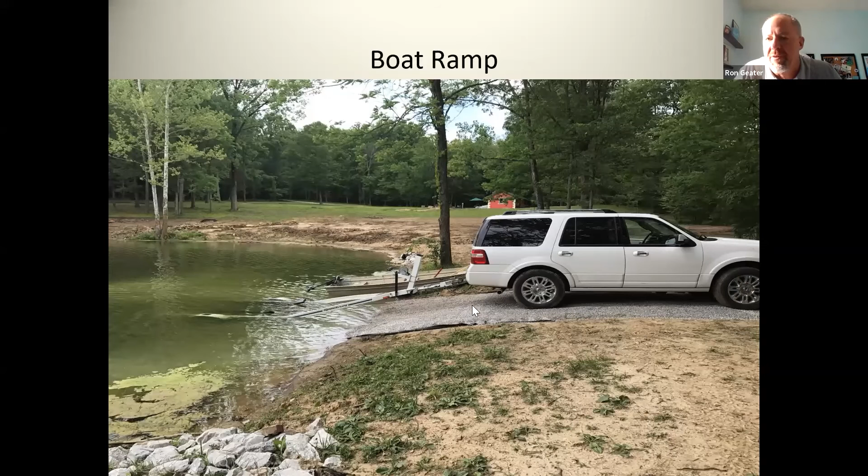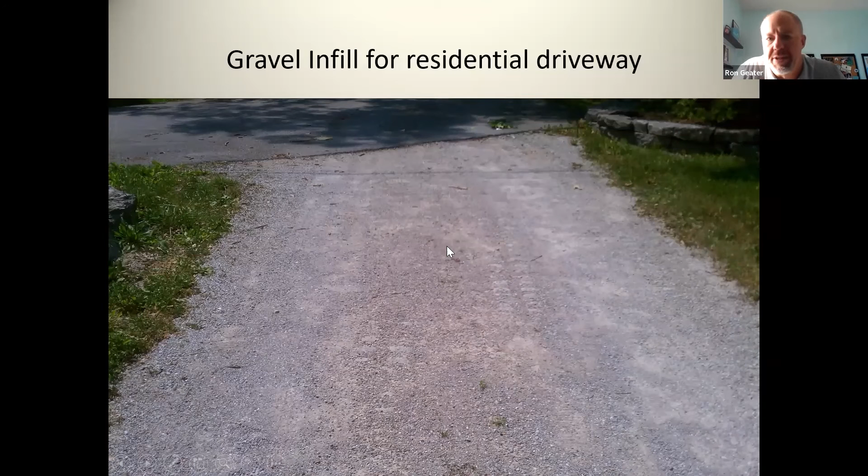Here's a residential gravel infill. And then the next one, you can do gravel, or you can just do a soil infill and seed in from the top.

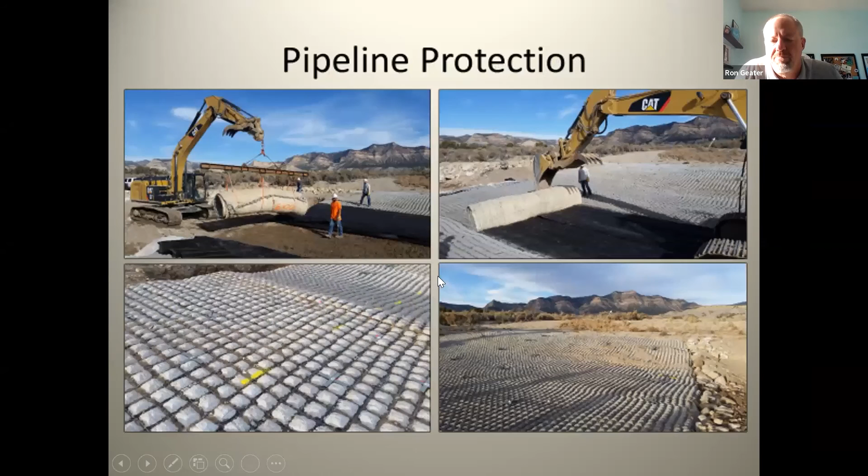Pipeline protection, where you don't want people digging, you put Flexamat. Ducks Unlimited, we do stuff with Ducks Unlimited, DNRs, NRCSs, Army Corps of Engineers, some of the hardest people to get your product specified. Canoe launches, why not? Let's just throw in a party favor, right?

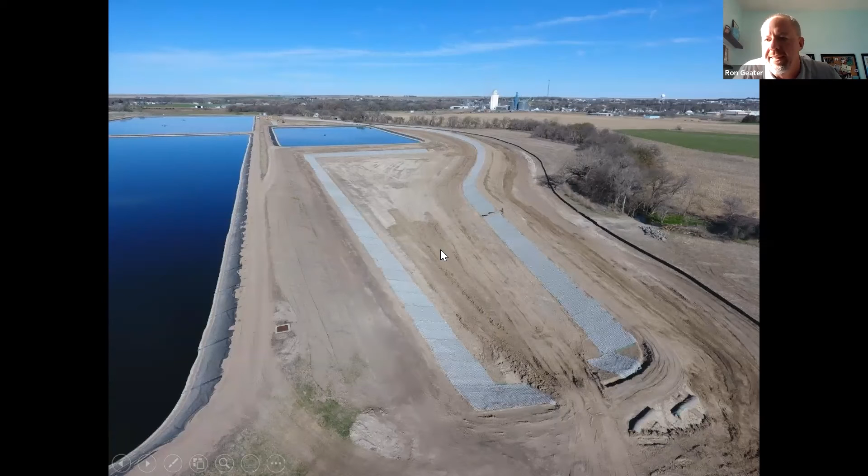Here's a job I did with ASP over in Oberlin, Kansas, a wastewater treatment plant. This was supposed to be all rock, and the engineer talked the city into using Flexamat. 93,000 square feet, we were $140,000 more than riprap, and the engineer talked them into using it because they felt like it was a better product and it was going to withstand over time.

Real quick, I know you guys don't really care what the cost of Flexamat is, but I'm going to give you a few examples. Here's a job, 3,300 square feet. The low bidder was $10 a square foot. Normally that would freak me out, but I get it, that's like 110 by 30, not very much there. Here's another job where they called it a tied concrete block mat.

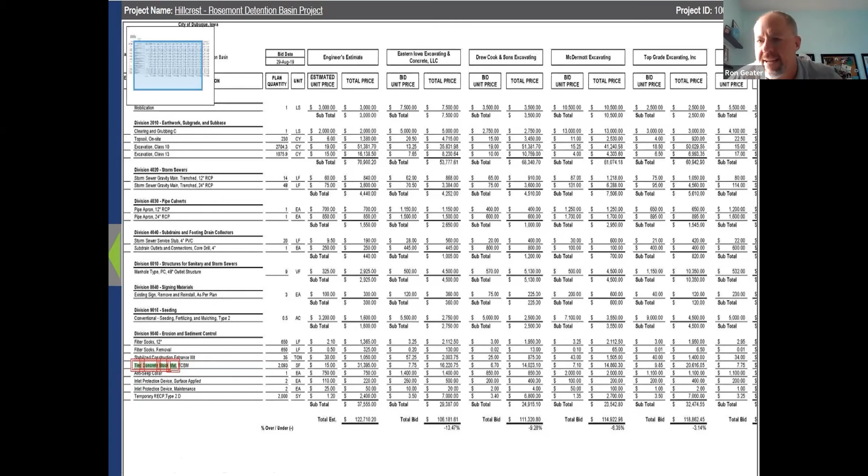2,093 square feet, not even half a truckload. Here's the thing that alarms me a little bit. This is the engineer's estimate. The engineer had it estimated at $15. The low bidder was at $7.75. Flexamat should be in that $6, $7, $8 a square foot range.

And then here's an Iowa DOT job, 11,500 square feet, so now we've got 2 or 3 truckloads. Low bidder, $5.50. That's a very, very strong number for Flexamat.

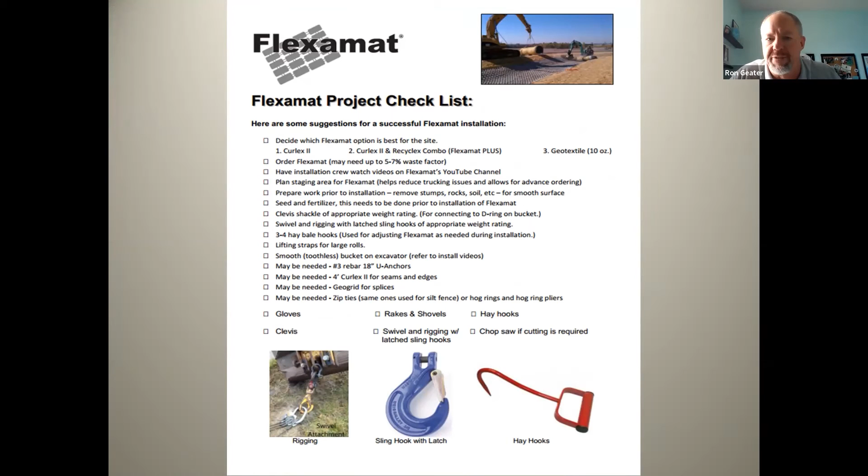We have this on our website, a project checklist. If no one's ever used it, go to the Flexamat YouTube channel. Probably the biggest thing is to remind the contractor to put the seed down. This is not like a straw blanket, you can't, there's no do-overs. It's really good to have the seed down before you lay the mat down.

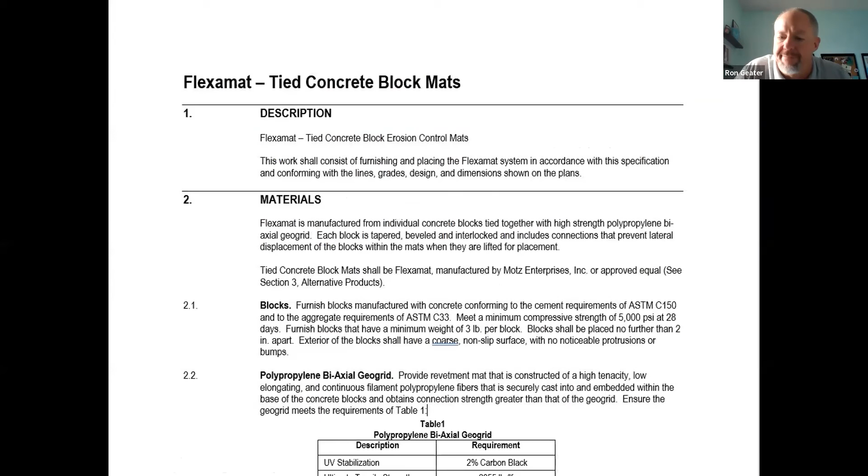We talked about the CAD details, they're all on our website for whatever application you're looking for, you can find them there. And then I know not all the time you can use the word Flexamat, so the generic term for Flexamat is tied concrete block mat, and I can furnish that to you as well if you want to design with it.

And then the last thing is we do this for free. You have a project, you get a hold of ASP or Quick Supply or me, send me the plan pages, and this is what we'll do. We will do a mat layout on each area. We'll give you the mat sizes, how many anchors, where overlaps are, what kind of trenching needs to be done, the whole 9 yards. So that when the job goes out and gets installed, we know that the contractor knows exactly what to do and we get a successful job.

That's incredible, man. Get yourself a drink of water. Do you want me to get to these questions? I do, we want you to get a drink of water, man. That's awesome, you're crushing it.

Can you show a drawing of the 45-degree bevel on the edges, how wide, how deep? I can send you something after this and even show you examples of job sites. But how wide, how deep? It's just typically when you go at a 45, you're just taking 2 block, which equates out to 1 foot, bevel it in at a 45 and then cover it up with dirt. We'll include that detail with the PDH certificates.

Do you have recommended Manning coefficients for bare Flexamat and vegetated Flexamat? Isn't it a lot higher than concrete pavement? That's a tough question to answer because our Manning's N factor changes with every job, so depending on your depth of water I would need to know that calculation first before I could tell you what the Manning's N is.